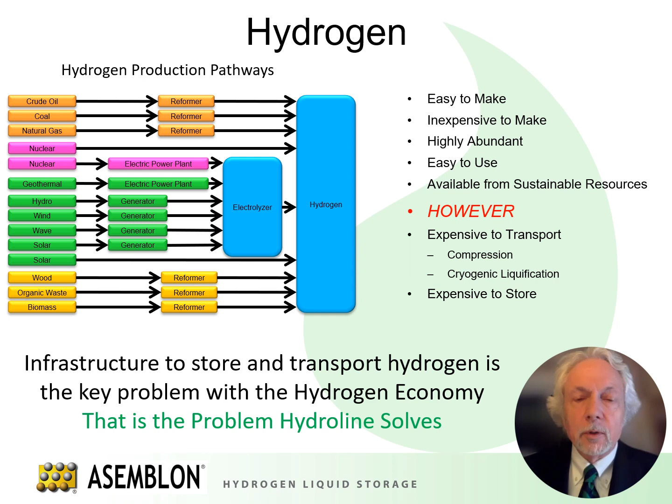We believe our technology is the future of hydrogen and can have an important role to play in addressing climate change. We all know that hydrogen is an abundant potential energy source and that there are numerous ways to make it. The problem has been, historically, that once you compress it, it makes it not cost competitive with hydrocarbon fuels.

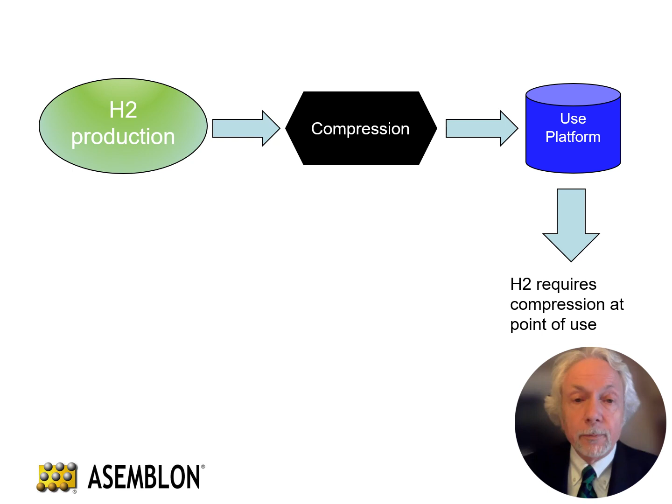Today, most hydrogen is stored and transported all over the world under compression. However, it is well known that the cost to compress gaseous hydrogen is what makes its price too high for widespread commercial use compared to gasoline or diesel fuels, that the volume of hydrogen one can deliver under compression is limited, and that the bleed off of hydrogen from a pressurized vessel quickly reduces the amount of available hydrogen. By eliminating this equipment expense and process, we can make hydrogen costs competitive with hydrocarbon fuels.

Our company is developing a family of liquid organic hydrogen carriers that we call Hydroline that store, transport, and dispense hydrogen at room temperature and without the need to pressurize it. This process involves chemically binding the hydrogen to the carrier molecule, a commonly performed process called hydrogenation, and then selectively removing the hydrogen for energy use on demand. Our technology works with hydrogen regardless of how it is produced: steam methane reforming, electrolysis, etc.

Since we will store and transport hydrogen in a liquid form at ambient temperature and pressure, much of the existing tanks and piping currently used in the storage and distribution of hydrocarbon fuels can be utilized with our carriers. This will greatly reduce capital expenses for deployment and encourage adoption of our technology. The material safety data for our carriers is very similar to that of gasoline, and ultimately, we'll be able to produce our carriers from biomass.

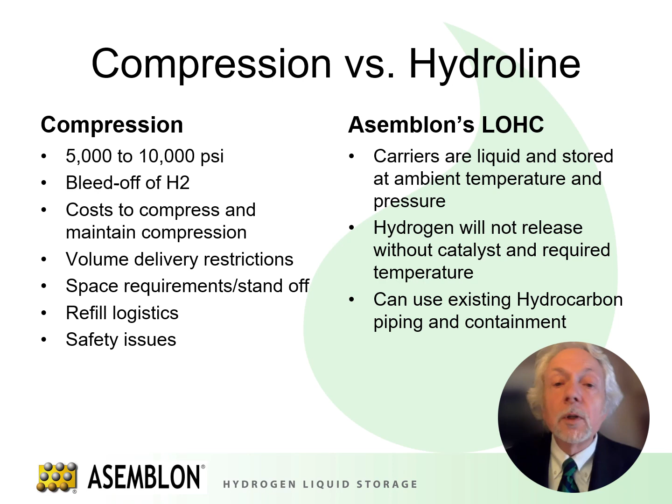Hydrogen will not release from our carriers unless in the presence of our proprietary catalyst and at a temperature of 200 to 230 degrees centigrade. You could spill the liquid on the ground and the hydrogen will not release. Our carrier liquids have hydrogen storage capacities ranging from 6.7% hydrogen to 13.6% weight by weight. These are called gravimetric capacities.

Our tests have demonstrated that we produce 99.99% pure hydrogen from our reactor without catalytic coating, and that we can remove hydrogen from our carrier molecules, capture the spent carrier by condensation, and then attach new hydrogen to the original carrier many times over without significant degradation of the liquid. The carrier then functions like a regenerable battery.

Unlike other carrier technologies, we can store hydrogen on board a vehicle and release it from the carrier using our reactor system. And for stationary hydrogen storage, our calculations and those of others show that we can store approximately 3.2 gigawatt hours of energy as hydrogen in a 30-foot by 60-foot non-pressurized tank using our carriers.

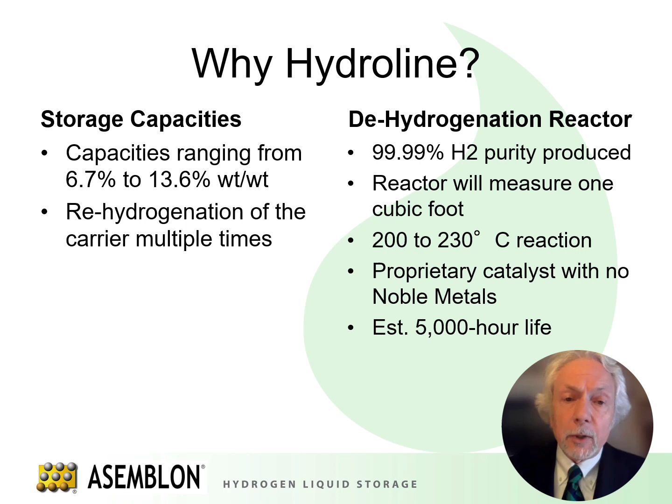There are two other types of liquid organic hydrogen carriers currently being commercialized. They are toluene, or methylcyclohexane, MCH, and ammonia. Toluene has a gravimetric capacity of approximately 6%. This volume is not suitable for storage and dehydrogenation on board most moving platforms, cars, trucks, etc., because the volume of liquid needed to provide sufficient range requires too much storage area on the vehicle.

Further, MCH requires a temperature of approximately 400 degrees centigrade in order to remove the hydrogen in a reactor unit that measures, from what we estimate, about 20 feet long, clearly not suitable for mobile uses. We are aware that Chiyoda International is transporting hydrogen from the Middle East using this carrier. An independent assessment has determined that only our second highest capacity carrier, which is 10.8%, will transport 74.5% more hydrogen on the same volume that MCH does. And we have even higher capacity carriers that may be even more attractive.

With other LOHC carriers, the hydrogen must be compressed once delivered in order to accommodate most current uses. This would not be the case for Asemblon's technology, as the hydrogen is extracted from the reactor in an uncompressed condition, and hydrogen production can occur at a stationary use site or on board a vehicle. Further, since the dehydrogenation temperature for toluene is approximately 400 degrees centigrade, one can expect greater molecular degradation of the carrier over time with related carrier replacement costs. Please note that both toluene and ammonia require noble metals in their catalysts, whereas Asemblon's Hydroline carriers will not.

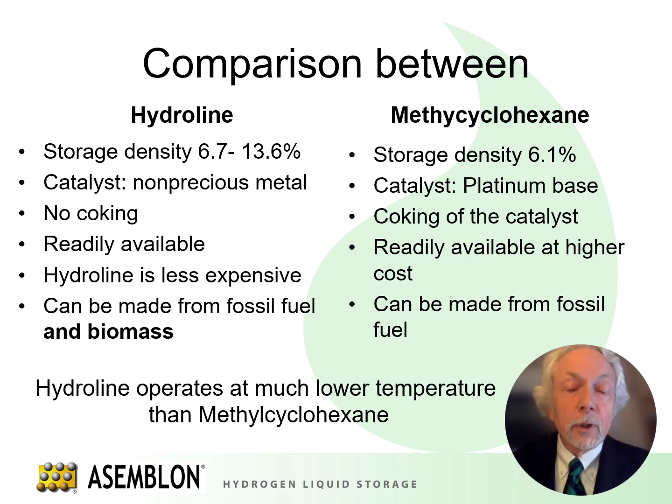Ammonia has a gravimetric capacity of approximately 17%, but ammonia simply delivers hydrogen one time, and the nitrogen resulting from the dehydrogenation of the carrier is off-gassed to the atmosphere. Like toluene, the dehydrogenation reactor is very large, so ammonia is only suitable for stationary hydrogen uses unless you were to recompress the hydrogen, which again causes the hydrogen to be too expensive for wide adoption. The temperature required to remove hydrogen from ammonia is approximately 600 degrees centigrade.

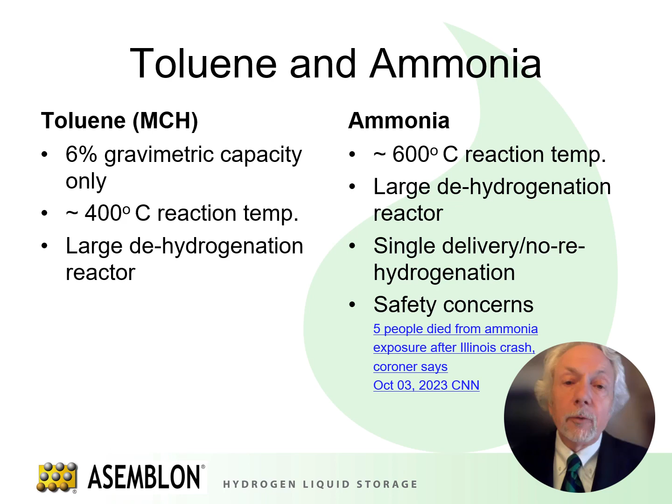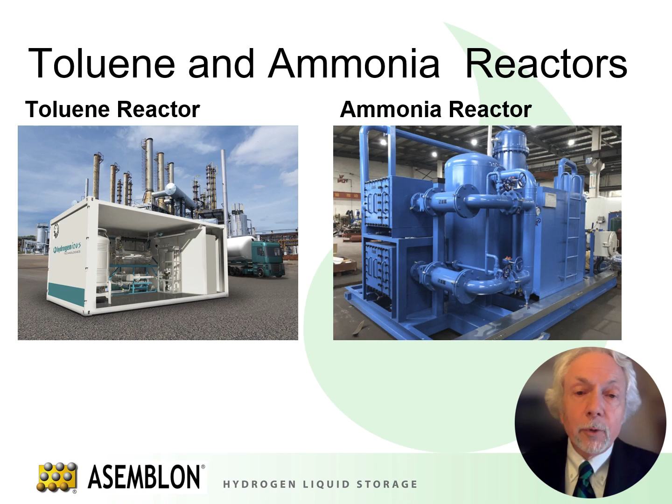Asemblon's Hydroline reactor system is being designed to measure approximately 1 cubic foot and will, in its first configuration, have hydrogen production of approximately 2,200 gaseous liters per minute. Our technology can be deployed in almost all platforms currently using hydrocarbon fuels: buses, locomotives, fleet vehicles, ships, industrial equipment, military applications, and large-scale municipal storage.

Looking forward, it is our expectation that once commercially demonstrated in several use cases, there will be high demand for our technology. We believe that EVs are only part of the environmental solution and that they come with challenges, including upgrading of the transformer networks and the fact that much of the lithium and other rare earth metals used in EV manufacturing are under the control of governments that are not necessarily aligned with our best interest. Even with just a few static storage only requirements that we've already identified, our expectation is that we will generate sufficient revenues early on to reduce the likelihood of further equity dilution after the current round.